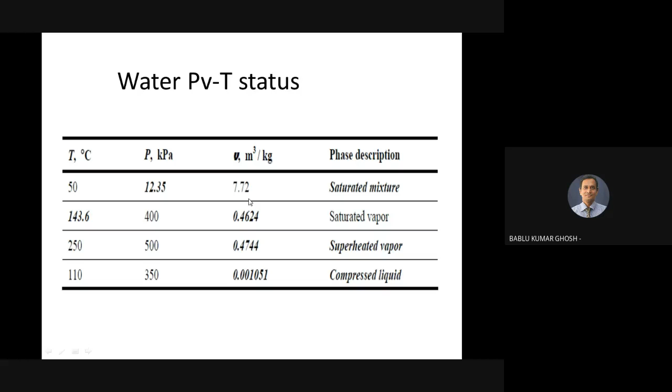Because in our previous lecture we discussed the three variables: temperature, pressure and specific volume. So how specific volume varies with temperature, how specific volume varies with pressure, it is in summarized form here. Before, we discussed that specific volume can vary with temperature, specific volume can vary with pressure. So here you can see the table that shows this, and specific volume at low pressure and temperature is high, but whenever you raise the temperature, it varies.

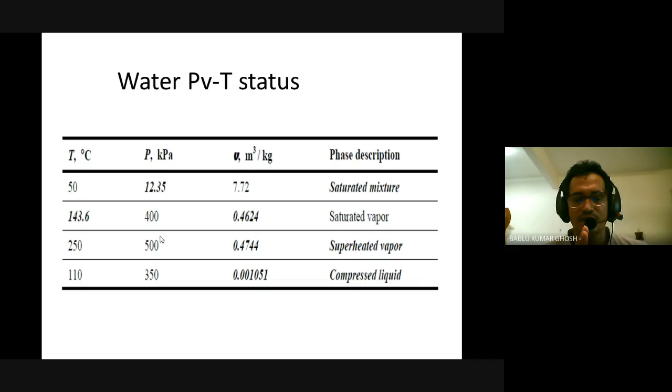So you know the phase goes from liquid phase to mixture phase to gaseous phase, three phases. Inside the boundary there is a mixture phase. Outside the boundary, to the right, it is truly vapor phase. To the left of the boundary, it is truly liquid phase. So in such phases, specific volume from the initial liquid phase is very minimum, whereas the final vapor phase is huge. That means it is actually varying with the application of either temperature or pressure, and it is considered that fluid water is actually the carrier of energy or heat energy.

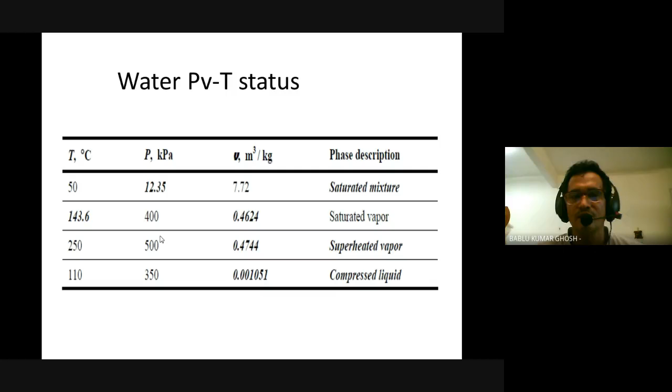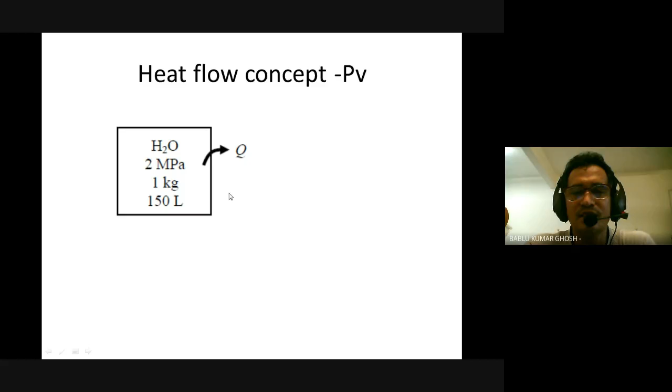So what can we do? We have to know or analyze the PV concept. How? We need to find the specific volume of the system. Specific volume means the volume per unit mass.

So what is the relationship between density and volume? That means liter, how to transfer it to meter cube? You should learn this first, because you know that for 1 meter cube of water, it is actually 1000 liter. 1 meter cube of water is 1000 liter, whereas 1 meter cube of air is only 1 kg of air. Why? Because the air density and water density vary, you have to think about how they differ. If air density is almost 1000 times less than water density, then definitely 1 meter cube equals 1000 liter water, and 1 meter cube equals 1 kg air.

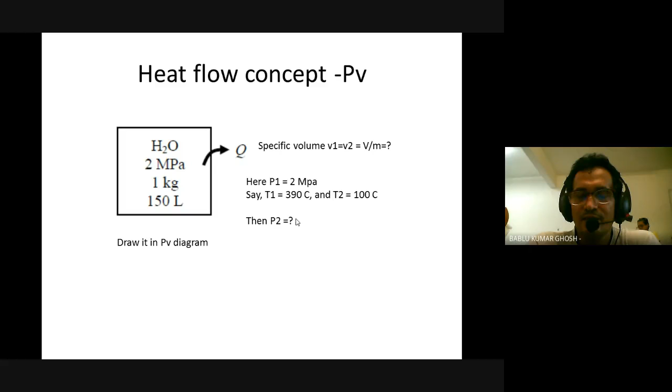We can also make a diagram in the PV system as a pressure-specific volume diagram. It should be: initial P1, V1, T1 is position 1, then P2, V2, T2 is position 2. With the same specific volume, V1 equals V2, at position 1 and position 2 the specific volume is written the same, because the volume is same and the mass is same, it does not change. Only pressure and temperature change.

Pressure and temperature are varying. While temperature is falling, definitely pressure will fall. So this is the variation. It's not clarified in numerical terms here, but you can calculate it: P1, V1, T1, P2, V2, T2, how it actually varies, and ultimately you can get P2. This P2 will satisfy this level, while P1, 2 megapascal, will satisfy this level.

So definitely the pressure is falling due to falling temperature. Why? Because heat is flowing out, meaning work is done by the system, not on the system. If heat energy flows inside, work is done on the system. If heat energy flows outside, work is done by the system. So since heat flows outside, the final temperature will fall and reach 100 degrees Celsius from 390 degrees Celsius, and in that situation the pressure must fall accordingly.

Volume per unit mass is actually the specific volume, but it is different from the previous scenario. In the previous scenario, the temperature was very high, that's why the heat was flowing outside. But here now it is minus 40 degrees Celsius. What will happen? Definitely the environmental energy will flow towards the inside of the system, since it is no longer adiabatic, no longer isolated from the environment.

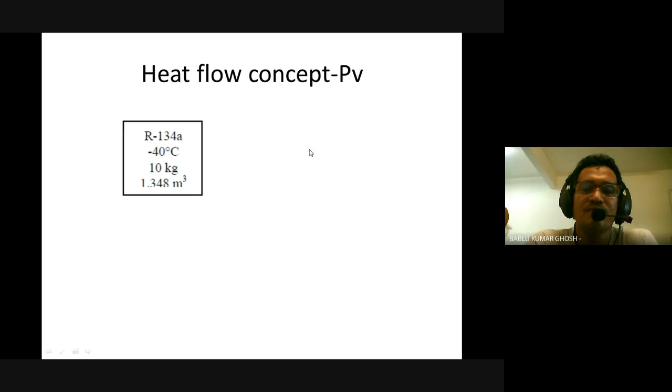So definitely the environment at 25 or 20 or 30 degrees Celsius is very much higher than the minus 40 degrees Celsius. So definitely the heat will flow from the environment to here. So what will happen? You can consider again the specific volume as volume per unit mass. It is similar as before.

Before it was in terms of liters, which can be transferred to meter cube. Now it is already in meter cube. So if you just put the meter cube and the mass together, then you will get the specific volume, because it is a confined area, with no more change in either materials or volume. So it is fixed for the initial and final stage.

What is changing? Here the initial pressure is 50 kilopascal, P1, and T1 is given here as minus 40 degrees Celsius, and T2 ultimately is 65 degrees Celsius. So think that it is actually kept inside a certain high temperature system, where a huge amount of heat is flowing inside, and it raised the temperature from minus 40 to plus 65. That means almost 105 degrees Celsius rise in temperature inside the environment.

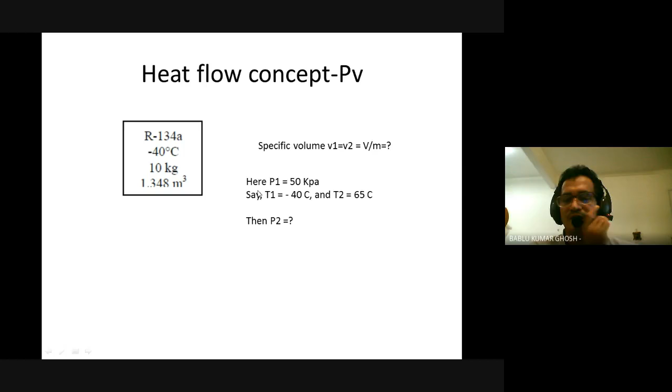So who is actually absorbing such temperature energy? Actually it's absorbed by the R-134a. So then here also the same thing - then what would be P2? The pressure should be what? So here, should pressure increase or decrease as temperature rises?

From the previous discussion, I think you realize that for low temperature, pressure should be high or low? For low temperature, pressure must be low or high? Because minus 40 degrees Celsius is very low compared to 65 degrees Celsius, so for low temperature, pressure must be low. If so, then the T2 situation P2 must be less or greater than 50 kilopascal.

The general concept, not calculating the value - should P2 be greater than 50 kilopascal or not? Greater, sir. The pressure at temperature 65 degrees Celsius should be higher in contrast to 50 kilopascal. It should be higher, must be higher. That is the tradition of Boyle's and Charles' law, or energy flow consideration. So it should be higher. So what will be the diagram, the PV diagram now?

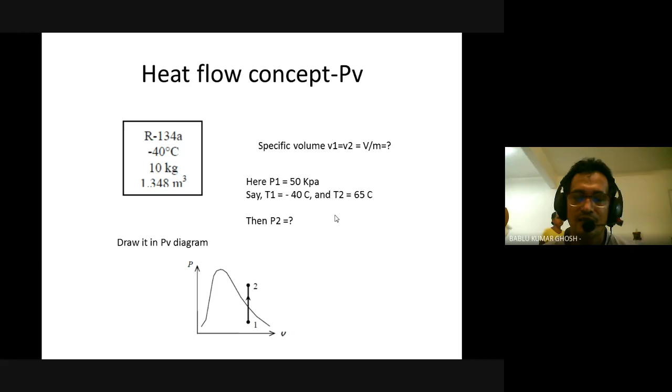Before it was down-shifting, from high pressure to low pressure. Now it should be like this, from low to high. So I think you understand from these two terminal conditions how temperature impacts pressure, since the specific volume is retained constant. Because we are only discussing P and V as hidden terms of temperature T. So in the PV coordinate, whenever temperature rises, pressure must rise, provided the specific volume is retained constant. But if the specific volume is also varying, then there is another scenario - it is a bit complex. If both pressure and specific volume are varying, then it is no more a straight line. It should be something different.

So now I think we discussed different strategies about these PVT diagrams of energy flow or heat energy flow. Now the heat flow concept in TV. Previously we discussed two slides based on PV, pressure and specific volume coordinates. Now we are discussing temperature and specific volume capacity perspective, while pressure is performing a crucial role. In the TV diagram, pressure is varying, and that will vary the temperature. In the case of a PV diagram, temperature will vary, and that will make a change in pressure.

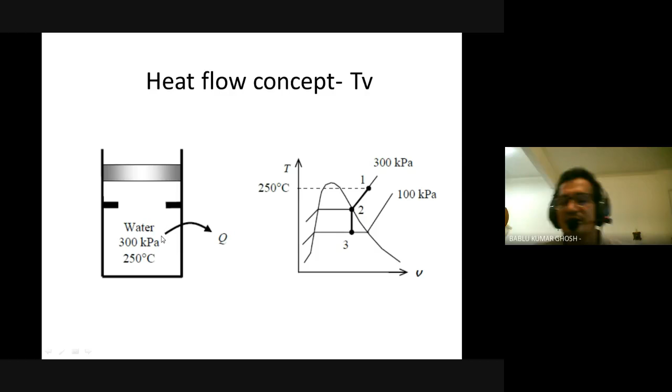Why do I think that? Here it is actually the T diagram and V diagram. There is a pressure coordinate. It should be like this, 2 to 3, but 2 to 3 is the same phase. But once it is at point 1, it is a different phase — it is the superheated phase of the vapor.

So definitely this stage has more specific volume than level 2, and level 2 is already in a stable stage, so no more changing specific volume — it maintains a similar specific volume while pressure is losing, and temperature will lose as well. This is the concept of how we can relate temperature and specific volume in terms of pressure.

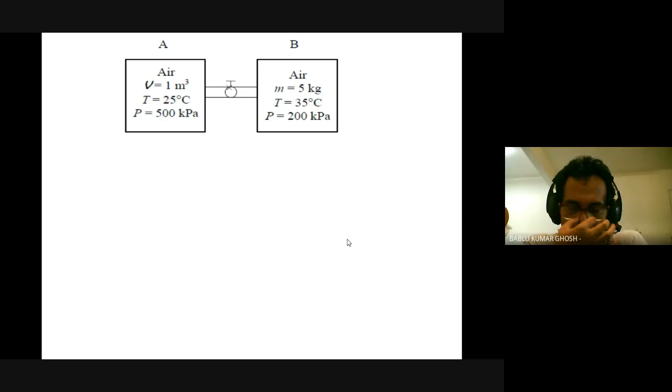Now here is another scenario: two different chambers. Chamber A has volume 1 meter cube, temperature 25 degrees Celsius, pressure 500 kilopascal. Chamber B has mass 5 kg, temperature 35 degrees Celsius, pressure 200 kilopascal.

So think that the first one is measured by volume, the second one is measured by mass, while pressure and temperature are written for both. It is actually isolated, tagging a valve at the middle. These are open systems actually, but locked by a valve. So once you open the valve, what will happen?

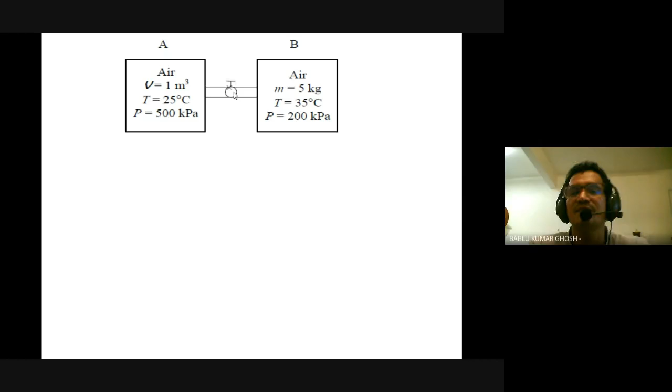What are the parameters that can change to make it reach equilibrium? You know that equilibrium is the more stable state in the world. Anything wants to stay at equilibrium.

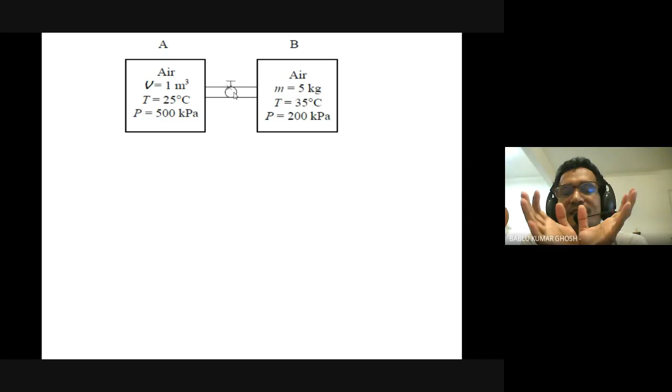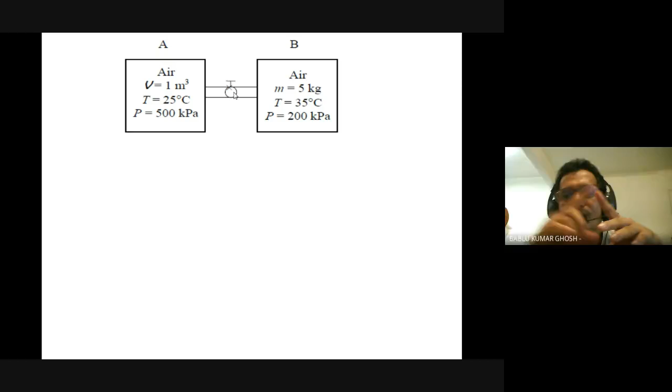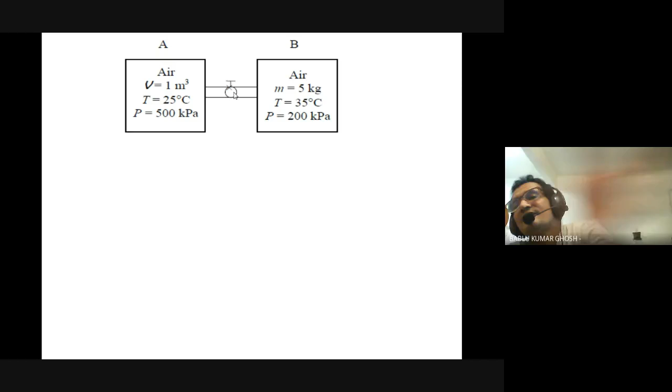Even in semiconductor systems, our energy systems, all while maintaining a high potential — what do they want to do? They want to flow current to move from high potential to low potential, to make the potential similar. That's why it flows electrons to maintain similar potential. But it is not possible because the electrons are already flowing through the load, being used as work. That's why it continuously maintains the potential and continuously does work.

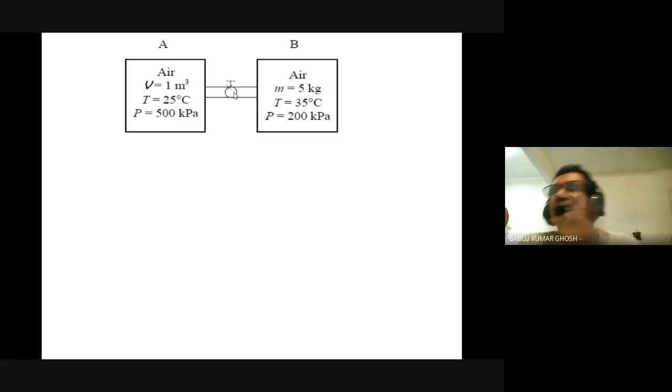That is like our house. We are maintaining 230 RMS voltage potential, and it continuously flows electrons to do our work. We enjoy our TV, our electric fan, our air conditioning, our mobile — everything is due to maintaining the potential, which allows current to flow.

Here also, to some extent, it maintains some variables — one is space temperature. Here it's 35 degrees, here it's 25 degrees. Definitely temperature will merge to reach an equilibrium temperature, and pressure will merge to reach an equilibrium pressure. So how can we make it reach equilibrium? That is the question.

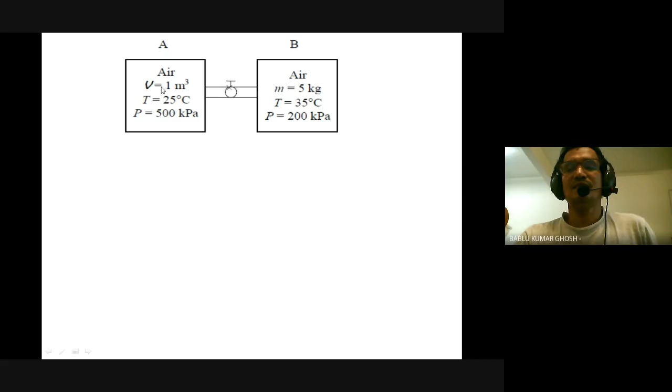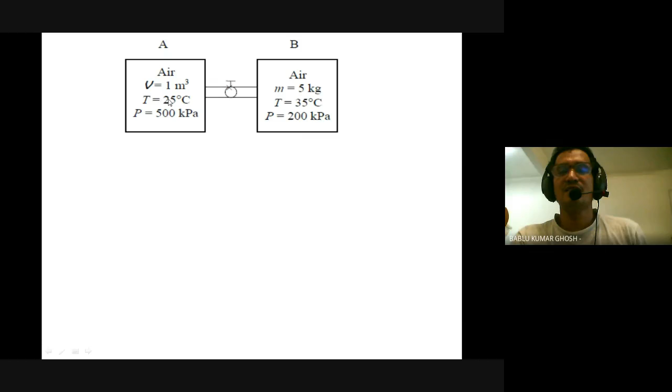Whenever we open the valve, there will definitely be an exchange of air between the high pressure and low pressure area, between the high temperature and low temperature area, and also between the high volume and high mass area. Because volume and mass are different coordinates, while pressure and temperature are fixed, we can distinguish which is less than the other and which pressure is higher.

So think about what the B bulb's volume will be, because we need to make something reach equilibrium. Here is volume, here is mass, so we definitely need to find the volume. How? Using PV equal to MRT.

V here is no more the specific volume, it is the absolute volume. So if it is absolute volume, then mass should be considered, and R is the gas constant, which for a pure substance is fixed, almost fixed for air.

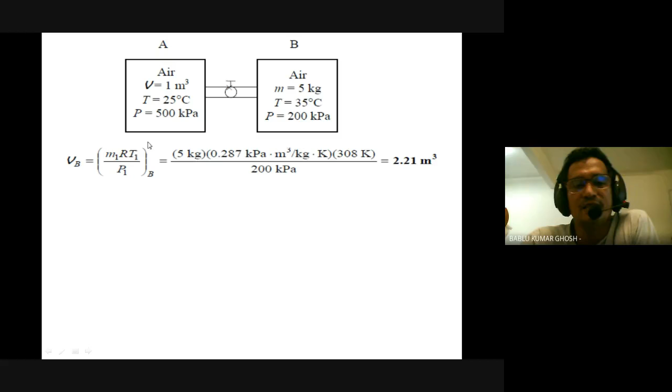So we should find M1. M1 here is 5 kg. The R value is 0.287 kilopascal meter cube per kg Kelvin — it is actually the gas constant for an ideal gas, say air in the gas fluid phase. And T is actually 35 degrees Celsius, which means 308 Kelvin.

And how about the pressure? Pressure is 200 kilopascal. So the volume should be 2.21 meter cube here. So think that here the volume is higher than this — here is 1 meter cube, here is 2.21 meter cube. So definitely this volume is higher than this. So what will happen here?

You can generalize that once the pressure is high, the volume is smaller. Pressure and volume are inversely proportional, while pressure and temperature are directly proportional. So think that here is 1 meter cube volume, here is 2.2 meter cube volume. Definitely here pressure should be low, there high, because high volume means low pressure, low volume means high pressure. Oppositely, high pressure means low volume, low pressure means high volume. Temperature near about 10 degrees Celsius, not very significant, but it should also be at equilibrium.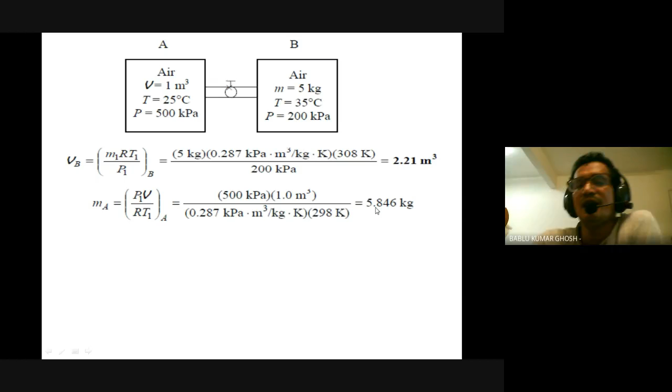So how? Now we can consider the mass for A. It is similar to the equation PV = mRT1. We know P at position A is 500 kilo, V is 1 meter cube, R is fixed, and T1 is actually 25 degrees meaning 298 Kelvin. Definitely it is 5.8. So think here is 5 kg, here is 5.8. That means here it is more compressed, but greater mass.

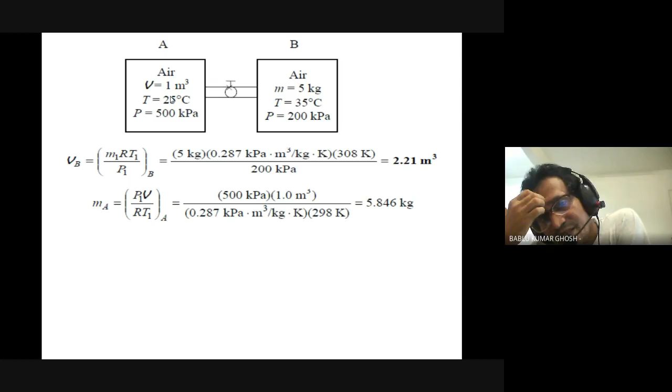So definitely specific volume here should be high or low. At position A, specific volume should be high or low. At chamber A and B, if you compare, specific volume, where should it be high? Here it is 2 by 5, here is 1 by 5.

Definitely here specific volume is high. Specific volume high means, please revert to the previous discussion, it is a more vibrant or less vibrant stage. It is more vibrant or volatile compared to this, because here specific volume is less than there. So specific volume high means it is more energetic to flow energy. Definitely it will try to flow to make it equilibrium.

And then if you consider the volume and mass in equilibrium, it should be like this. The volume VA and VB should be 3.21, the total equivalent volume. If we don't consider this volume, then it should be the whole volume, and if you consider the whole mass, it should be this.

Now we can consider the average specific volume here. Which one is greater, this one or this one? Definitely this one should be higher. So the flow rate must be this way, from B to A.

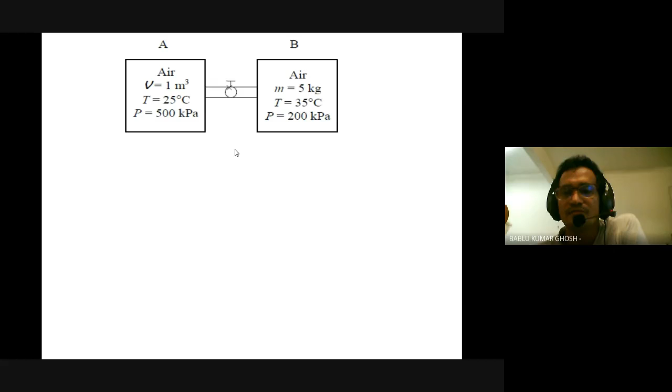Here also outward. But think that here there is no more marking about the mass flow or volume flow. But how can we understand? We understand that definitely at position B, the specific volume is greater than at position A.

So definitely the final stage mass is for the total system volume. Mass is 10.846 kg as we get it here, and the total volume is 3.21 meter cube, and R is fixed for a particular medium, say air, it is almost 0.287.

And then the temperature here is 293. Actually we do not measure the temperature here directly, but you can find it, because if you consider this one PV equals... here is PVT, then finally you can get the equivalent temperature. It should be like this.

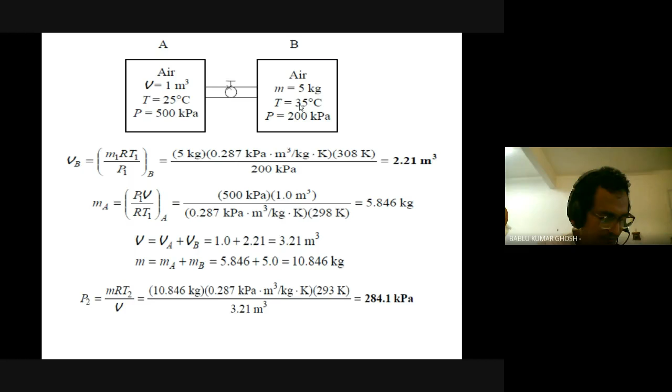Just wait. Yeah, please, I am in the class, so please tell me very shortly. Yeah, please. Yeah, madam.

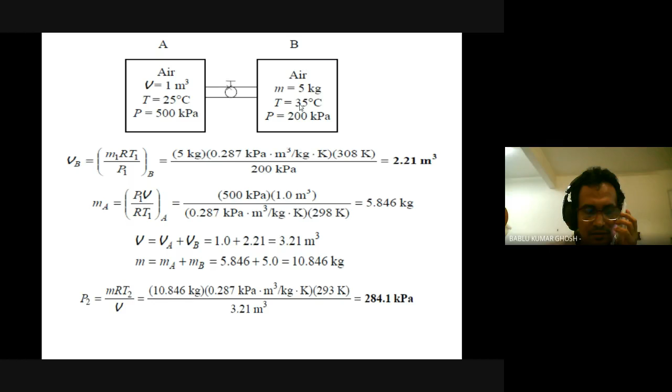Oh, they are asking. They are asking for you, from you.

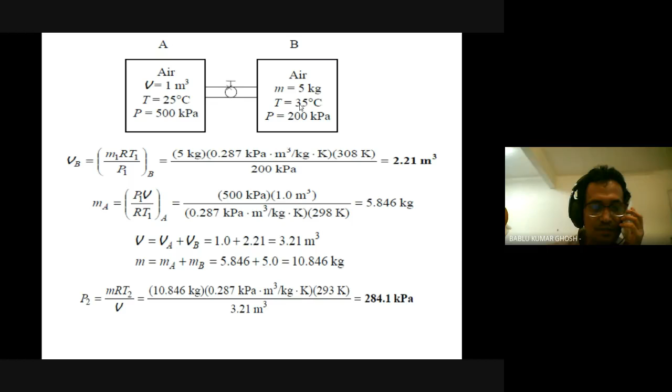Sorry for the interruption. So actually, there is a mass at position B that is 5 kg at temperature 35 degrees Celsius. At position A, it's already decided that it's 5.8 kg at temperature 25 degrees Celsius. So definitely the resultant temperature will be between 35 and 25. While the mass here is a little bit higher, how can we get the energy?

The energy should be balanced. Energy will flow and make a balance, so the Q1 and Q2 should be at equilibrium. If so, then here...

You can also solve it yourself. I think you understand what I want to say: mass and temperature difference multiplied by specific heat capacity will give the amount of heat energy. Here also, the mass of the air, its temperature difference, and specific heat capacity will give the heat amount. Since the specific heat capacity is fixed, we can get the resultant temperature by equating both sides, and it should ultimately be around 30 degrees Celsius.

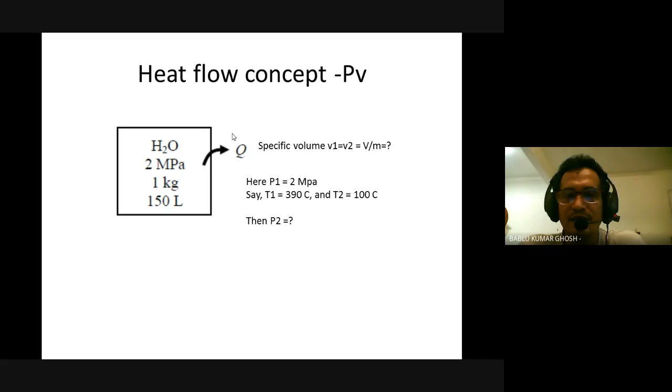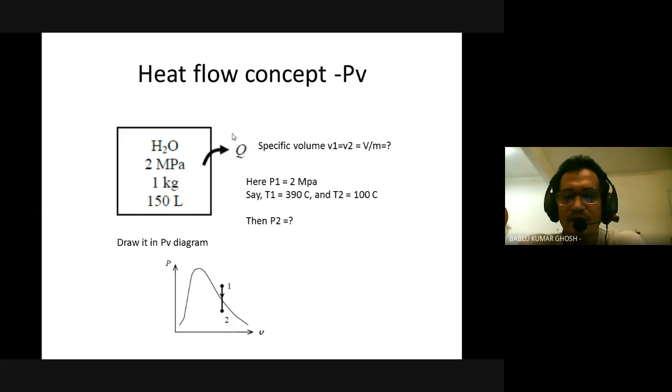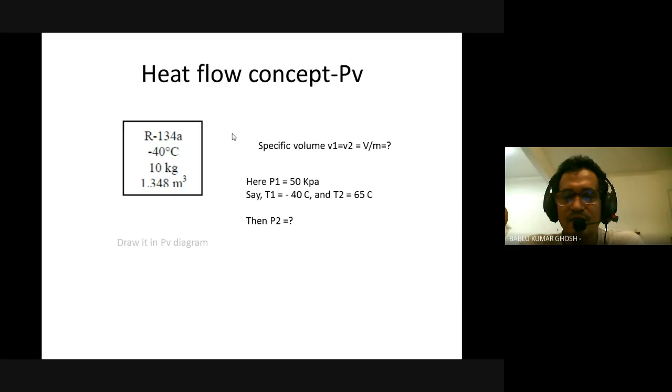Before, we discussed it separately, let me show you once again. We looked at the high temperature situation, how energy flows and how pressure reaches equilibrium, flowing from high to low, while temperature also moves from high to low. The second case is a low temperature environment, where heat must flow inward and ultimately raise the temperature. If so, the pressure should rise, going from 1 to 2.

Then we discussed the temperature effect on pressure. In the high temperature situation of water vapor, it definitely loses energy to the environment, and it will transfer from the vapor level to the saturation level, the mixture of liquid and vapor. Because it is losing energy, the temperature will fall.

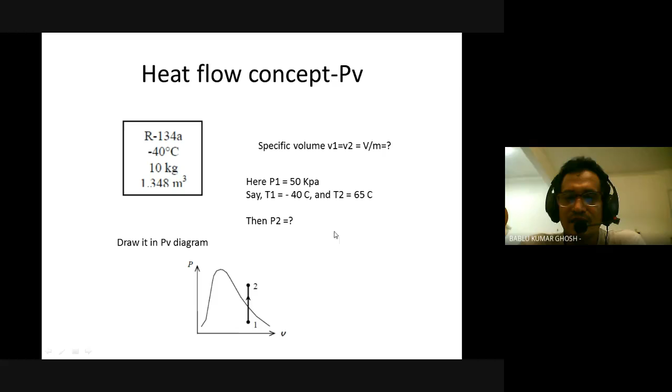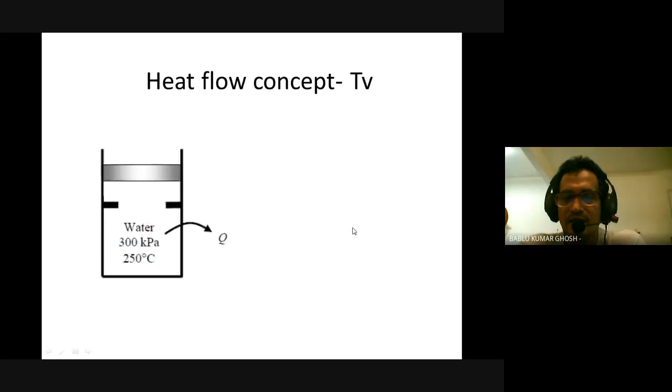Once it maintains equilibrium, it keeps the specific volume constant, and due to the variation of pressure, the temperature must fall. So the concept here is: low pressure means low temperature. Previously the concept was: high temperature means high pressure. So that's the temperature and pressure relationship, while the specific volume is maintained constant, here from 2 to 1, or 1 to 2, maintaining a constant specific volume.

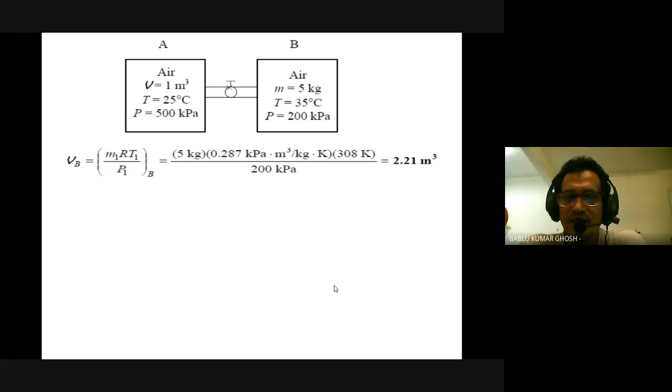Now the third situation is the mixture, the combination of thermodynamic states. First we need to find the unknown volume of the second stage. Then we have to measure the unknown mass of the first stage. Then we can mix them together. Once we mix the mass and temperature, there will be a resultant temperature, and by maintaining that resultant temperature we can get the resultant pressure.

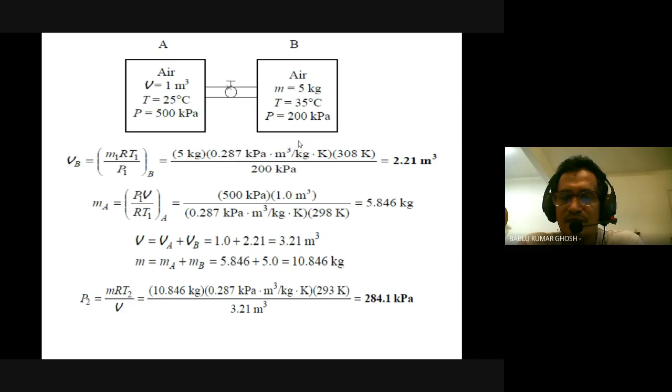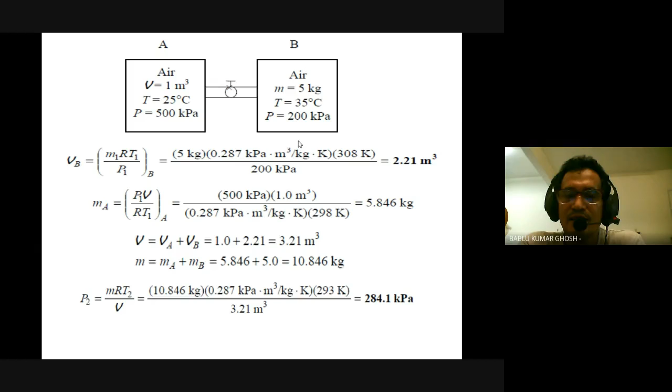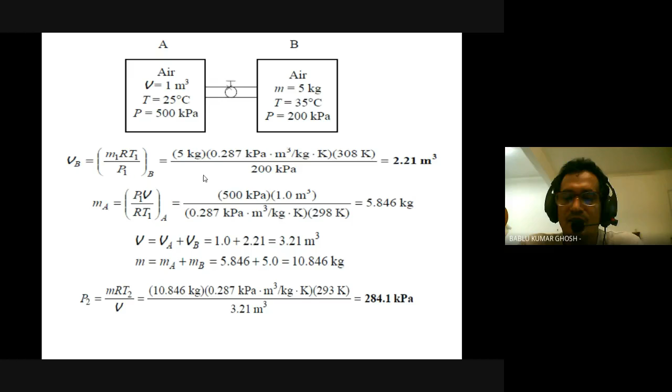So this is a very simple, fundamental analysis of heat energy flow through a pure substance, here water vapor or water itself. It certainly has specific volume, specific density, specific temperature and pressure, everything varies with a third variable. Whenever it's a PV diagram, temperature influences the variation of pressure. Whenever it's a TV diagram, pressure causes the variation of temperature. That is the scenario of how pressure and temperature coordinates, volume or mass, play around to maintain the equilibrium of the system.

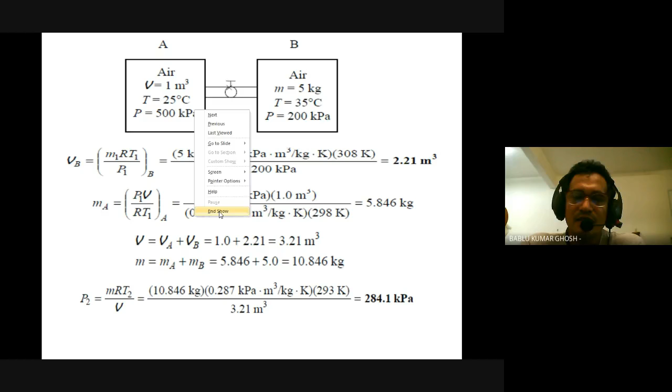I think that's all from my lecture today, or my tutorial, whatever you intend to learn. And I think if you want, we can go now towards the attendance part.